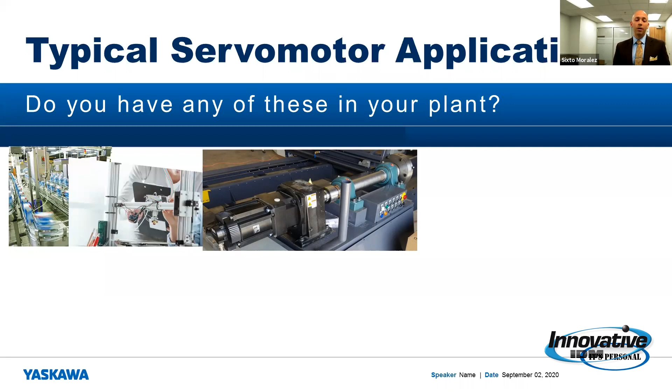At this point, we wanted to open this up to show a couple of typical servo motor applications. Maybe you guys have some of these in your plants, some bottling or labeling applications, maybe some R&D, looking at gantry systems or 3D printers. Maybe it's some sort of tensioning or winding application where you have to maintain tension on a particular process. Maybe it's a rack and pinion gantry system, 20, 30 feet long by 40 feet wide. Let's get a little more complex with a rotary knife application, a slitter, or a sheeter. Let's get really complex, and pull some pulleys in various places to reduce or make motion for rotating applications. And then maybe some large ones for linear actuators, to make some forward or inverse kinematics.

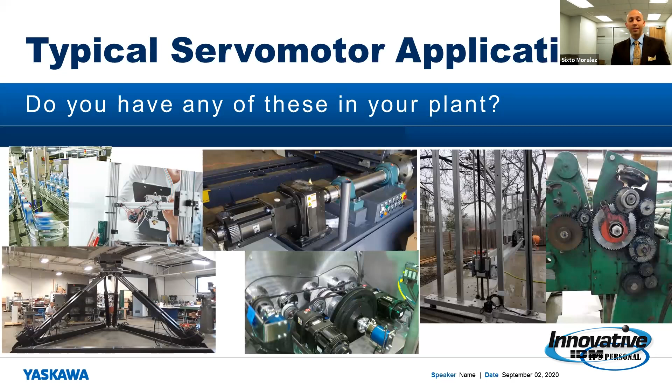So you guys all have your keyboards out, and in the chat window, if you wouldn't mind, let's take a couple seconds and type in what are some of the various applications that we didn't touch on. We'll take a little pause here and see if there are some applications you guys can put in there, so please feel free to do that.

Mr. David Cole says, yeah, we got some bag loading, palletizing. Very good, those are good applications. Okay, yep, got some other winding. Yep, okay good. Well, if you guys continue on typing in the chat window, we can review those at a later point in the presentation.

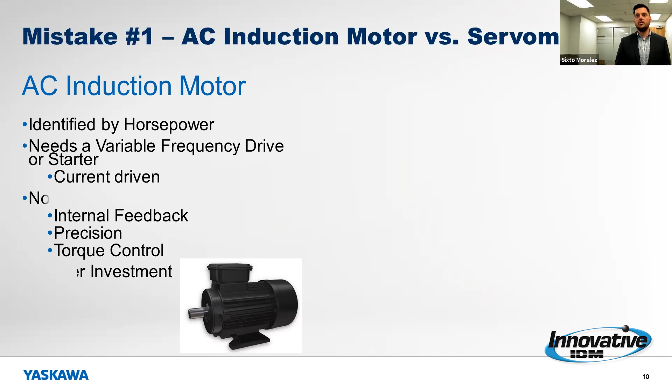Mistake number one is comparing a servo motor to an AC induction motor. The reason we talk about this is because most people, when they call us with an application for a servo motor, the very first thing they do is look at the kilowatt rating on a servo motor and associate that to horsepower on a standard AC motor.

It's important that you not do this, and there's a couple of reasons why. First of all, AC motors are rated by horsepower. They typically use a soft starter or a variable frequency drive to start that motor. They are current driven. Typically, asynchronous motors don't have positioning feedback or torque control, with a few exceptions, and they usually have a lower overall initial investment.

A servo motor, on the other hand, is identified by kilowatt, not by horsepower. So what people normally do is say, oh, I have a 1 horsepower motor, I need a 1 kilowatt servo motor. That's usually not enough information to go forward.

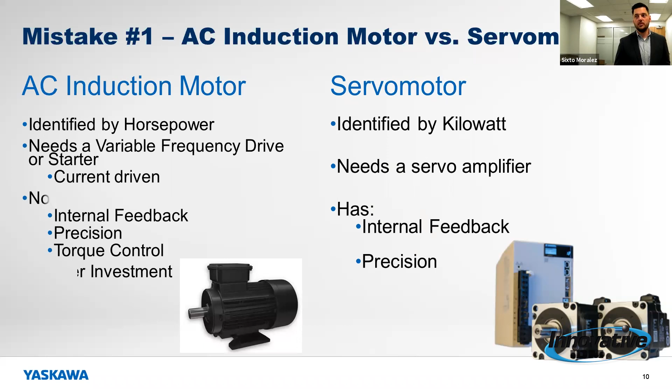The next thing people forget about with a servo motor is that they usually require a servo amplifier as well. Servo motors have internal feedback, they are very precise in their movements, and they typically have a larger upfront investment.

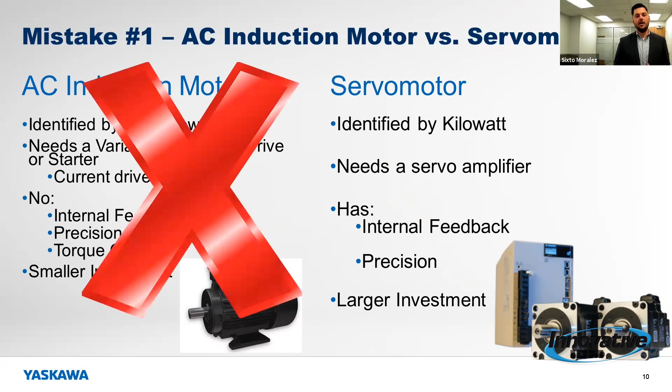So again, is it okay to use an induction motor as a guide for sizing a servo motor? No, it's not. Don't fall into this trap. That's mistake number one.

Mistake number two is ignoring the inertia ratio. This is something very specific to servo motors that you usually don't have to worry about with AC motors, so it's worth elaborating here for just a little bit.

So let's say someone calls you up and says, okay Sixto, I heard what you said about horsepower, I didn't size my servo based on horsepower, I did it the right way, I sized it based on speed and based on torque. That's all you need, right? No, it's not all we need.

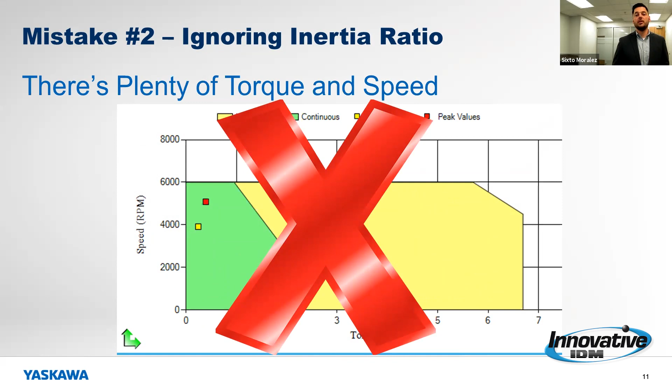There's a little more information that would be really helpful here, and it'll save you a whole lot of stress as you're implementing your motion system. So what are we talking about when we actually talk about the ratio of inertia in a system?

Well, what is inertia? Your high school physics class is probably coming back to haunt you a little bit right now. But basically, inertia is just the resistance of anything to move. It's also the resistance of anything to stop moving until it's acted upon by an outside force.

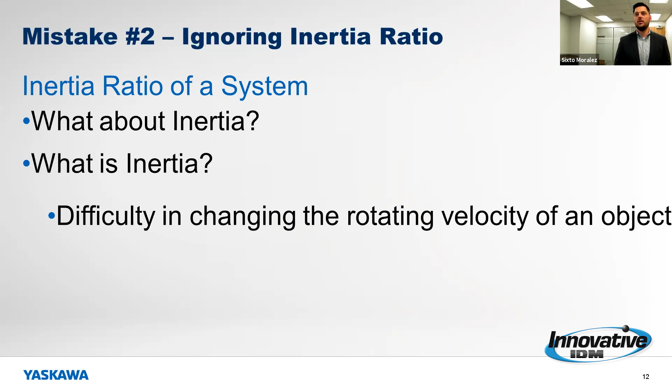Take, for example, throwing a tennis ball. If I were to just grab a tennis ball and toss it to someone, odds are they're going to be able to catch that tennis ball and control it really easily. Now, what happens if that tennis ball turns into a bowling ball and I have to lob it over to you, and you have to catch it and control it without dropping it? That's where inertia comes into play.

That's why it's really important that we don't factor in just speed or torque, but we also look at the overall inertia. It's also worth mentioning that not only do you have to concern yourself with the load inertia, you also have to concern yourself with the motor inertia as well.

Let's go back to our tennis ball example for a moment. If I throw a tennis ball, odds are it's going to take me just a little bit of effort to do so, but it's probably going to take even less effort for someone who's an NFL linebacker or a professional bodybuilder. In that case, just like a servo motor, it takes significantly more power just to get that motor going than it does to actually do the task at hand.

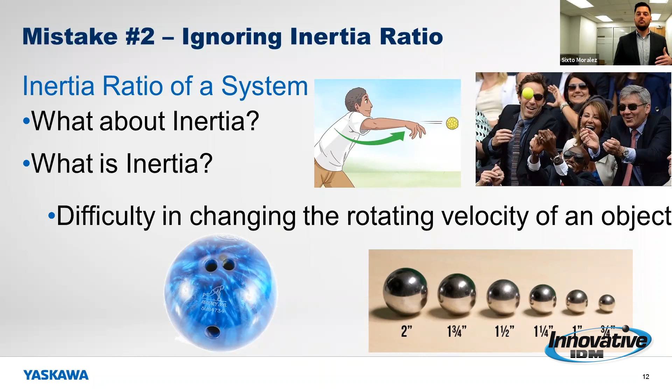So not only is it important to look at the load, but it's also important to look at the motor. Which brings me to my next point: when you're comparing these two, it's important to look at that ratio together as a complete system.

So in this case, an easy way to tell if we're sizing a correct motor based on inertia is to look at the inertia of the load divided by the inertia of the motor. Typically speaking, most manufacturers of servo motors can maintain a 10-to-1 ratio, meaning the load can have 10 times the inertia of the motor and the motor can still control it.

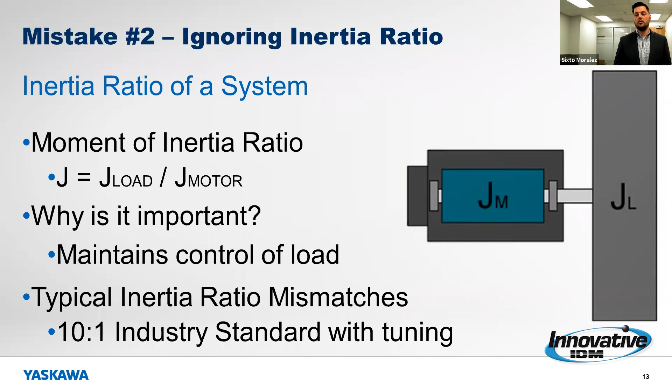With proper tuning, our systems at Yaskawa can go even further. So again, that's why it's important to take into account the ratio of inertia, because typically speaking, you can use a much smaller servo motor to get the same task done as a much larger AC motor.

Oh, this is a good one. Who's been guilty of this one? Feel free to answer in the chat window if you have a good story about this. But I can promise you, I get phone calls like this all the time. And I call this the competitor crossover trap.

It goes something like this. Someone calls me, they say they've got a machine and it's working, but the servo motor just crashed on it. And unfortunately, for whatever reason, they want to look at that servo motor and they want to just pull it out and replace it with a brand new one.

That's great. The problem is when people say, okay, I want to replace this old XYZ competitor servo motor with one from Yaskawa because of the known reliability. We know it's great, we know how it works. Awesome, I'm happy to do that for you. Is that going to be a drop-in replacement? No, typically that is not going to be a drop-in replacement.

Don't fall into this trap. Don't look at just the torque and the speed of your competitor and try to size a servo motor based off of that. Don't look at just the inertia either. Take it one step further.

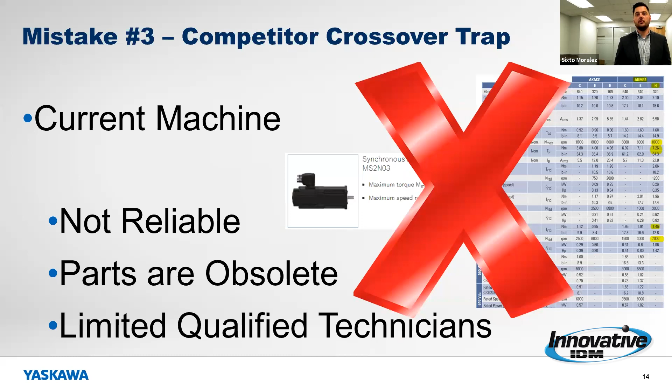When you look at a competitor's servo motor, bear in mind, not all servo motors are the same. There's different sizes to each servo motor, there's different form factors. There could be different shaft lengths, different shaft widths. Maybe it has a key, maybe it doesn't. There's a lot to factor in here.

Odds are the reason why you're calling in the first place is because that original OEM of that piece of equipment is gone. Maybe they're out of business, maybe they're not supporting you all that well. But the bottom line is, if you want to make sure you're doing this right, take that information from that crossover—is it just a guide? Maybe it's something you double check when you're all done. But don't rely on it completely to be 100% accurate and correct.

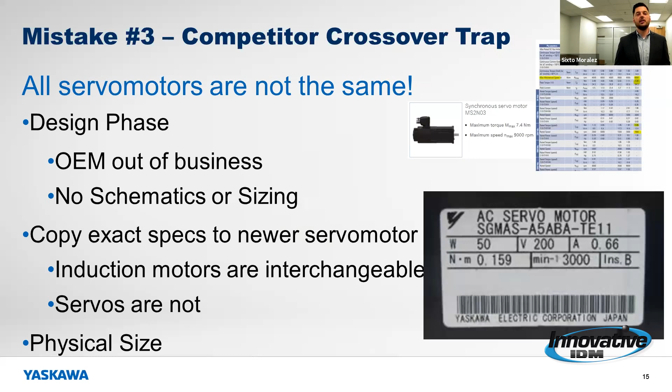And again, most of us, if we're doing this anyway, we're going to take that competitor's crossover information and probably upsize it just to make sure we're covered. So at that point, now you're looking at a servo motor that may be 20%, maybe 30%, maybe 50% larger than you really need it to be. So there's lots to keep in mind here, and you're much better off doing a full servo sizing from the ground up than just trying to copy someone else's previous information.

So with that in mind, Sixto, can you tell us a little more about some of the common servo applications you see in the field?

Why, certainly, Michael, I sure can. So let's review just a couple that we've done over the years. So the typical one is a ball screw, right? Got a gantry, some sort of a gantry style. Take a look at this picture here.

This is moving in a horizontal direction, going back and forth of some sort. There's some sort of station whereby the x-axis is moving left and right, some sort of jobs that have to happen. So those types of applications are going to need some sort of precision for that movement.

So the questions we start asking ourselves are, well, what is the load? What are we moving? What is the payload? How heavy is that? How heavy is that enclosure? How heavy are those brackets?

Again, an overall estimation may be good, but if you have a current working system, maybe there are software tools built into the control that's already on that, so you can pull off and say, well, it's really only ever using 5, maybe 10 newton meters of torque, maybe 2. Because remember, if the motor is rated for 4,000 RPM, but your movements never hit anywhere near that number, then there's really no need to use a 4,000 RPM motor.

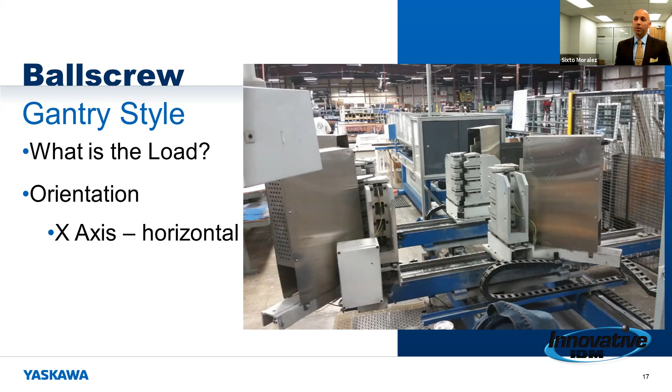So that's one question. The next question, obviously, as you see here, you know it's going to be horizontal, but it could also be vertical. So the orientation is important because gravity can affect the motion profile, can affect the payload, which in turn will affect the servo motor as well.

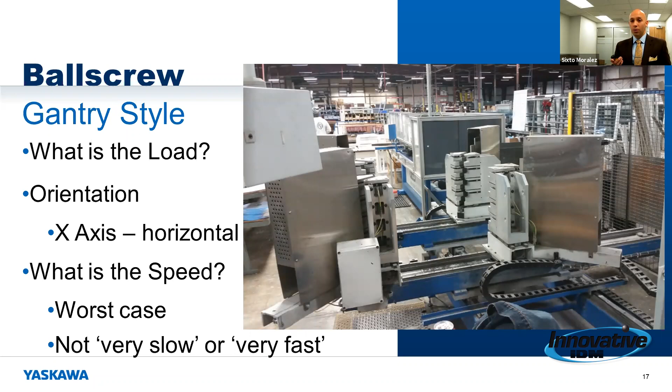This question: what is the speed? It's kind of hypothetical—what's the speed? We typically want the worst case, but it can't be very slow or very fast because it's relative, right? Relative to someone who's moving very slow, 1,000 RPM may seem slow, whereas somebody else may think no, that's actually very fast for the machine. So those are some typical questions that you would start asking about the applications that you see.

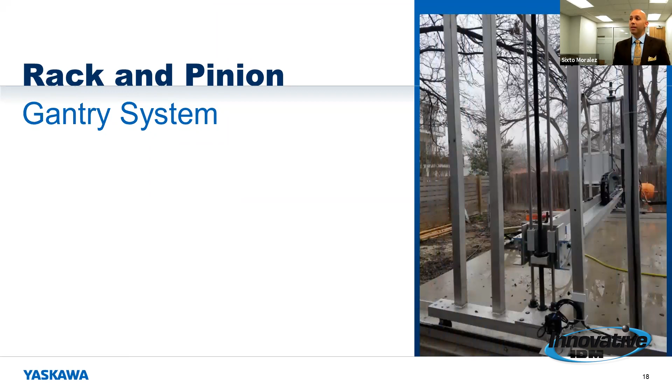Change up a little bit here to a rack and pinion system. Still with a gantry style of a system, but let's take it outdoors. Maybe you see how far the axis has to travel. This is a pretty big gantry system here. Maybe it's a 40-foot length of travel, maybe 30 feet high and 20 feet wide.

It can't be just it's got to go just this much or just a little ways. You typically want to have what the distance is that you want to make a move profile in and to do the travel.

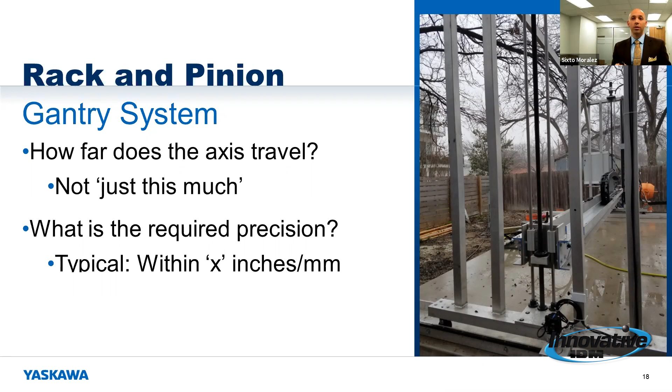So precision, what's the required precision, or what's the typical tolerance that you need to stay within? Some applications are perfectly fine staying within a quarter of an inch or half an inch, and some of them have to get into the 2 millimeter or 1 millimeter window. So it varies from application to application what the precision required is.

And if you don't know, if you already have a current machine, typically you can guesstimate where you need to be on the precision question.

As this application is showing, the environment is going to be outside. So this is in Texas. It's going to see 120, 130 degree weather. It may even see a blizzard if you've been around last month. So it has to sustain those types of hazards or environments.

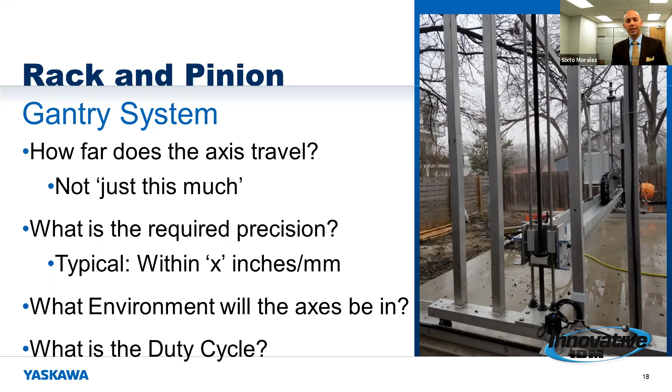As well as the duty cycle - how often is this thing going to be working? Is it 100%? Is it 30%? And those sort of things. You may not know the exact number or percentage of the duty cycle, but you know in my shift we have 2 working shifts, so 5 or 6 to 9, or 6 to 12, whatever that is, you'll know kind of what that duty cycle is that you need for the machine to be running.

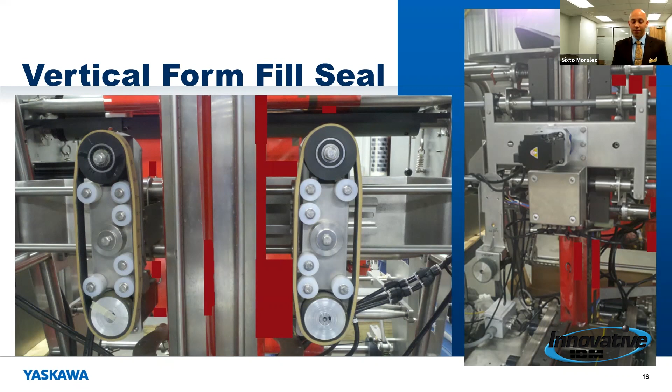Your true typical vertical form, fill, and seal machine. So it's bagging anything from small, say peanuts, to dog food, cat food, that sort of thing.

Let's not forget, on the same vertical form, fill, and seal machine, that a servo is doing what's called a pull or a film pull, where it's feeding in the film. There's some tension that's going on up top, but you want to maintain that. And so right here you have the 2 pulleys. There's a ratio between these 2 here that it's actually pulling. And so we want to be able to size that appropriately. You don't want to go too big, but then again you want to make sure it has enough torque to maintain for the speed.

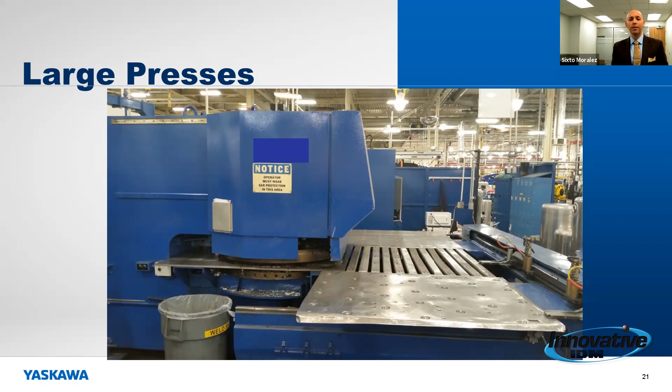Let's get really big, let's do some large presses. On the left-hand side you notice that there's a rotary of some sort. So there's some sort of a rotary application or rotary motor that might be useful to rivet or to drill some holes, as well as the indexer that goes in and out. So that could possibly be a servo motor application as well. Just things to think about as you're going through the plant and wondering.

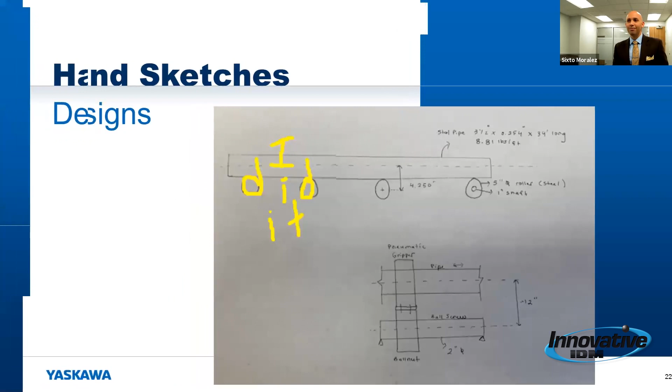So it's always good to be able to go through these types of sketches. You may say, well, my payload is going to be up here. I do have the 2 drum rollers that are bound over here. We could maybe add a little idler roller at the bottom. And then there's some sort of palletizing machine that's going to be on the left-hand side. Who knows? But that's what R&D is. So we can go from there and at least take some specs to know what we want to do to size it.

All right, as promised, it's Michael's turn now. So we're going to talk about some gearbox selection and some important tips.

Excellent drawing as always, Sixto. It's always a good idea to make a hand sketch, especially when you're trying to understand the key concepts. And speaking of key concepts, let's talk about gearboxes for just a second.

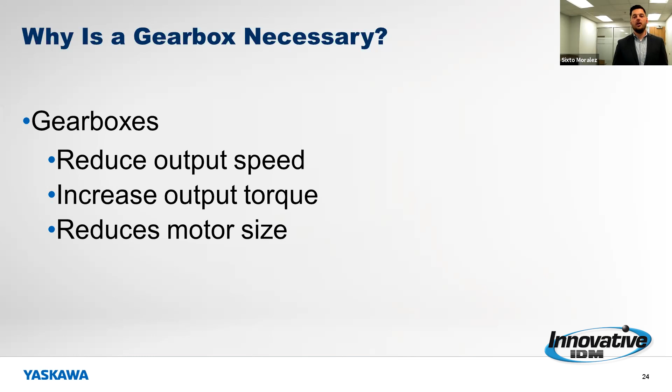So why do we need a gearbox? Why is a gearbox necessary? Well, there's 3 things that typically are accomplished by using a gearbox. 1, you're going to reduce the overall output speed. 2, you're going to increase the overall output torque. And 3, odds are you're going to decrease the motor size. All of these are very good things for the right application.

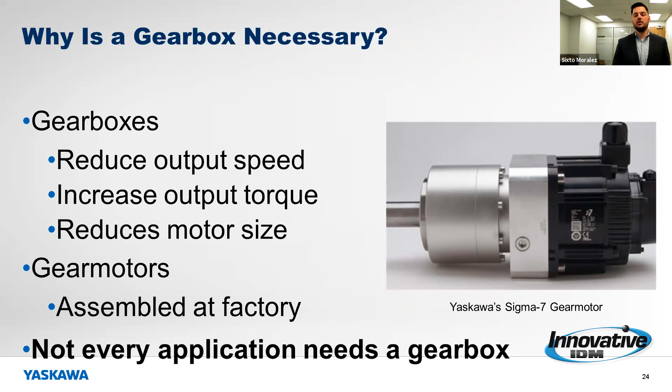Okay, another thing that's really great about using a gearbox is the fact that it reduces reflective inertia of the load to the motor by a factor of the square of the ratio. So if you're using a 10-to-1 gearbox, guess what? That's a 100 times reduction in that reflective inertia. So it's going to help out a whole lot if that's a problem for you too when you're sizing.

Now, I'm going to tell you a rule of thumb as well. As a sales engineer who's been doing this a long time, it's always best to try to start with a 10-to-1 ratio for your gearbox if you're going to have to use one. And here's why. As most of you are already aware, gearboxes are set up in multiple stages. You have single stage, 2-stage, 3-stage gearbox, etc. 10-to-1 is the highest ratio you can get in a single stage gearbox for most manufacturers.

So if you're going to have to use a gearbox anyway, using one like this is going to give you the most bang for the buck and give you the most value. So use that 10-to-1. It'll also help you reduce your motor size, and odds are you'll be able to balance that motor size and that cost of the gearbox really nicely with a 10-to-1 reduction. So again, shoot for a 10-to-1 reduction. If you can't get it done there, look at what you can do to change that. Maybe you need to go to a higher ratio. Maybe you need to go with a bigger motor, etc.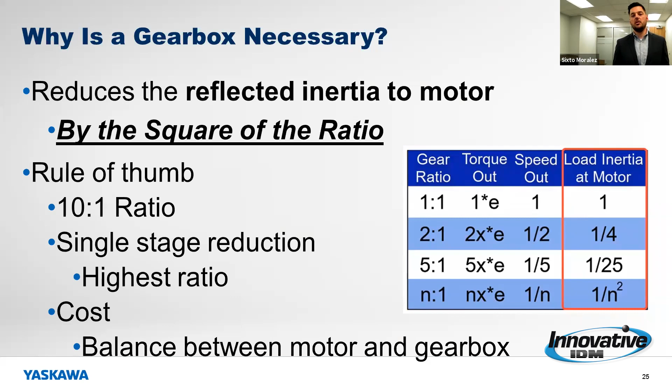So now, Sixto, tell us a little more about where we can find more information on Yaskawa Motion.

I'm so glad you asked, Michael.

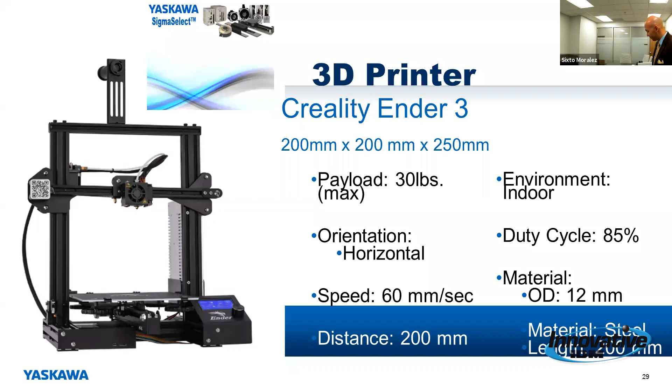All right, let's see, Pepper, this should work. So again, the sizing software is free for download. What you find at the very beginning is just putting in some credential items. Maybe you have some information you want to send, or put in your name, company name, email address. And then there's some application notes, you may want to type in, this is a 3D printer prelim. Be sure and save, because you always want to back up your stuff. But in this case, I'm going to continue on.

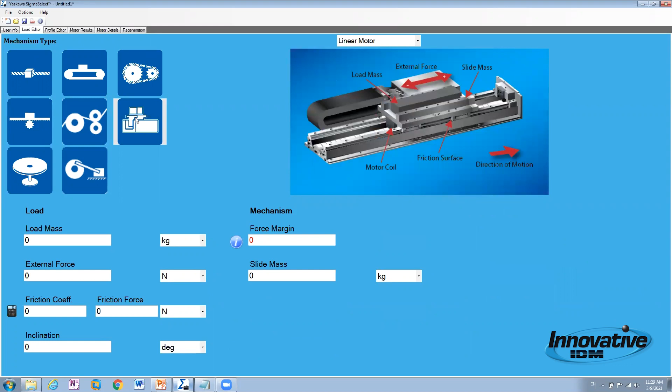We mentioned earlier that there are different mechanisms for various applications. So just to go through these, we've got a ball screw, we have a belt system, there's a chain and sprocket, the rack and pinion that we showed earlier, a roll feeder. These are also typical in a lot of different applications. We have a linear motor we can put in as well, if we want to go basic we can do some rotary tables or rotary applications. And there's even a cool one here for a crank application, whereby you can size up a crank mechanism.

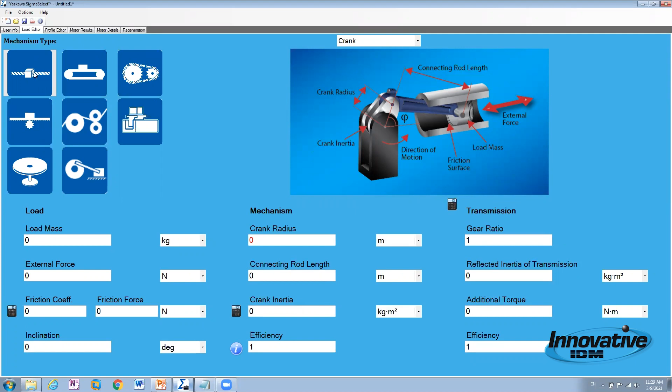In this case, we're going to stick with the ball screw. It may be a general one, but it's pretty simple. Load mass, right here is where we put in what that load mass is going to be, and I think we decided on 30 pounds.

Maybe the part is no more than 20 pounds, and maybe the plate adds another 5 or 10, so we'll just say 30. There's no external force, but we're just going to touch on the main parameters you want to enter into the sizing software here.

So the coefficient of friction, the materials, we'll do a mechanism with ball bearings in there, so we'll just keep that coefficient of friction low and say accept.

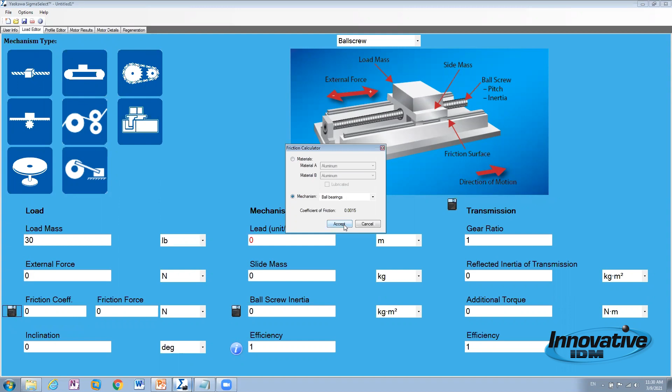Now, this is not vertical, so we're going to keep this inclination at 0, that's horizontal. This lead, we want to know how many units of travel we're going to move in one revolution of that ball screw. Let's keep it in inches. We can change the inches here. We'll say 1/4 of an inch - one rev of that ball screw is going to be 1/4 of an inch.

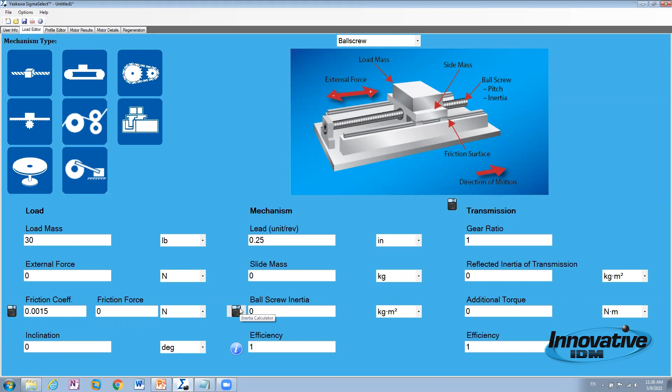And now we actually have to find the inertia of what we're rotating, as Michael had mentioned in his slide. You can change this name here to a ball screw if you wanted to, or whatever name you want to give it. These units can change as well, but we'll keep it in millimeters for now.

And let's just say the height of this is 180 millimeters, you could put 200 as well - we'll just put 200 for the entire length of that ball screw. The outer diameter we mentioned was 12 millimeters, so we'll just say 12 millimeters there.

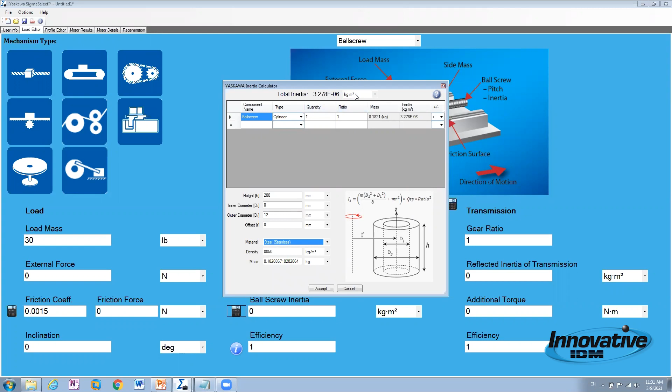And then the material - we have quite a few different material selections here. We want to pick the stainless steel and keep that, and that gives us the inertia of the ball screw. We'll say accept.

Now, at this point, your mechanism is pretty much done as far as what you enter into the sizing software. We want to leave the gear ratio at 1:1 just for now to see how big of a motor we even need to run this thing by itself. Let's move on to the profile editor.

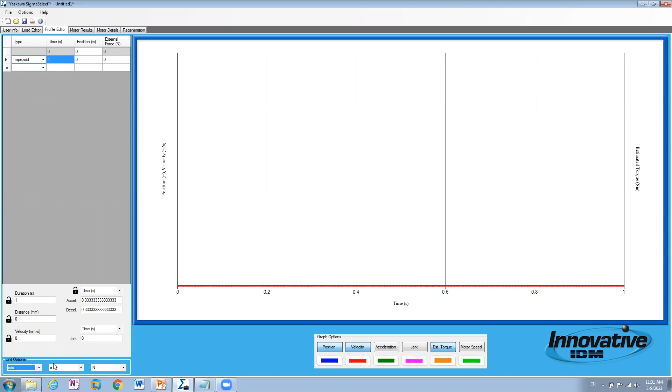This is cool - the drop down here, if you just select a trapezoid, it'll give you a third order motion profile. We can change these user units to millimeters per second. We did say that the Creality Ender was at 60 millimeters a second, but for total distance, let's do 200 millimeters.

And in the acceleration time, we want to get that up in the half-second range - you want to get the speed pretty quick. So you can see that the motion profile is starting to build upon itself here. You can take a look at different options or deselect some of these options.

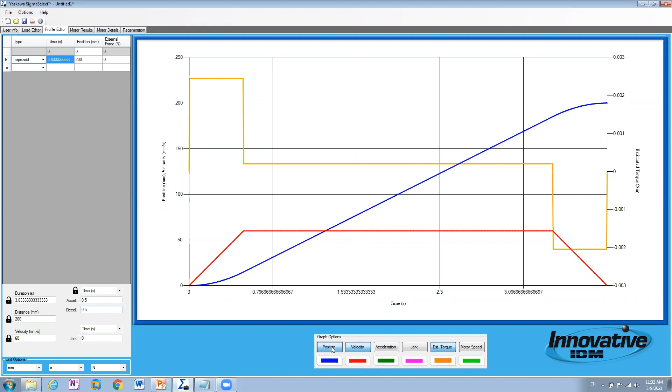So the position - if you don't really care about the position just yet, you can look at your velocity that's going on here. You can look at the motor speed to actually know if your motor is going at the speed that you believe it should be. Let's bring back motor position there.

And then it's always important to do a return move - in this case we'll just keep it at 1 second, and the return move is just negative of everything that we've done there. That real quick, 200 - there we go. So again, I'm just copying these same numbers in here. All right, so let's say that's a return move, and the dwell, we'll just leave it at 1 second.

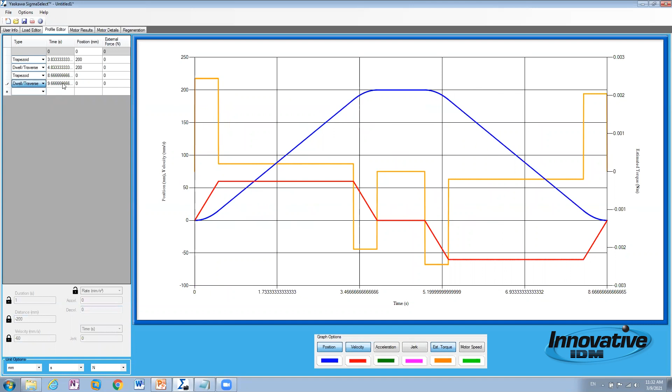So now we want to look at what are our motor results. Now it does give you a bunch of information here. We're just going to uncheck all this stuff and just look at the Sigma 7 - Yaskawa's Sigma 7 series is the latest and greatest. And we want to uncheck this torque factor of safety because we want to look at what amount of torque do we really need to move this motor.

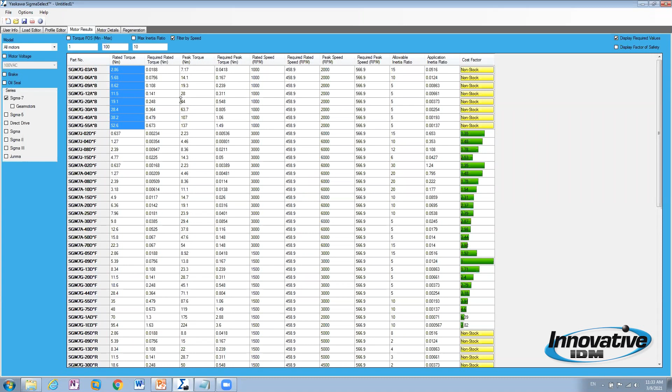And we can display what the required values are for the application - so the required is right here, what the motor has is here. But then let's also do the factor of safety. I like color, and usually green for everything is good.

So if we look at this 7J 200 watt motor, we can see that there is enough factor of safety for the required rated torque, the peak torque, the same thing for the required rated speed and the peak speed. But the thing we want to pay attention to is this inertia ratio - this is a pretty low one here, very very low, which means the motor has more inertia than the load, which is fine - we can still work with that.

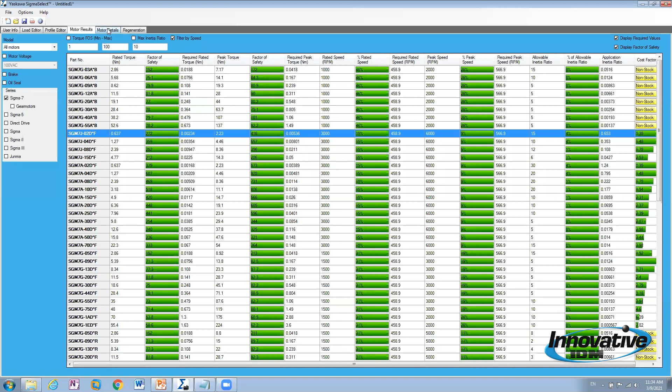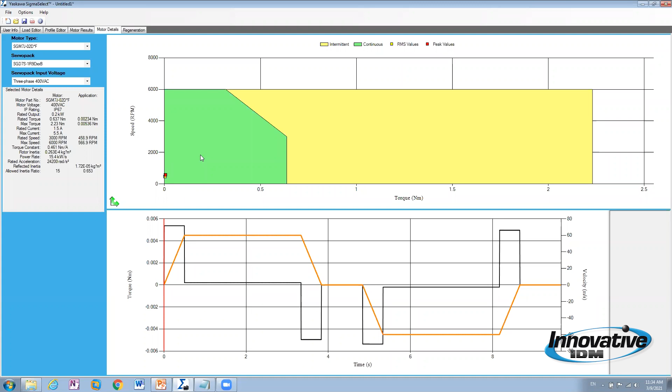And then in the speed torque curve, we give the ability to look at what's in the continuous region and what's in the peak region. This is a good one to just verify that you're not outperforming the motor by any means. The last tab is this regeneration tab.

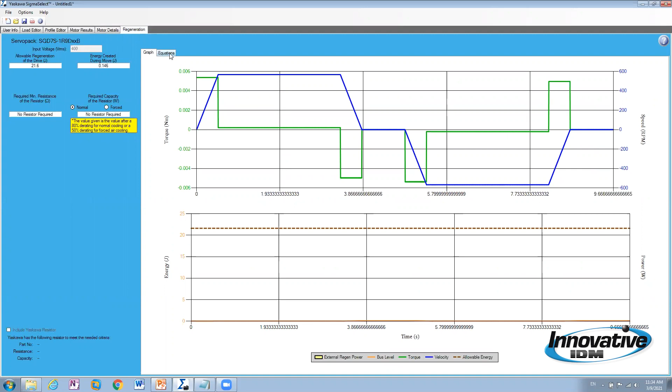Now this will give you if there's any sort of regen that's needed. And typically on horizontal applications, you don't get that. The equations would be here in this tab as well so that we can verify that sort of thing.

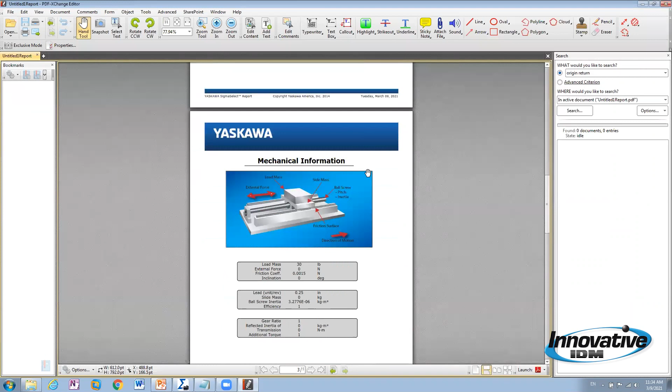Once you save your application, you then can get what's called a PDF report. It'll give you a little report that spits out how all your application is running. You can kind of give this to either your customer, OEM, different specs and so forth as to what the sizing file will entail and how it moves, as well as the rated data of the motor and the application.

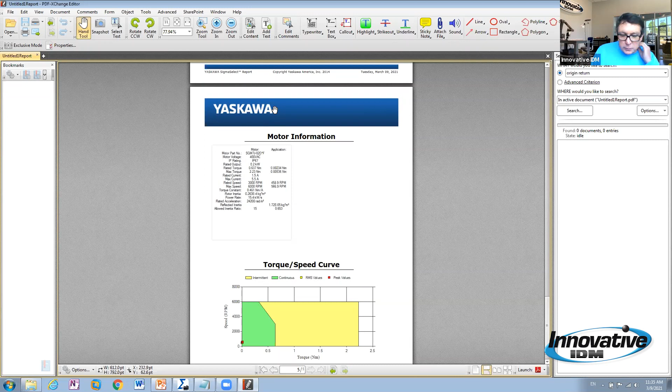I had one more for you, Michael and Sixto. Says, I have a rotary table with 5 stations. Good for servo, yes or no?

Yeah, that's an excellent application for a servo. As you could see earlier, that's one of our templates we already have pre-built in our sizing software. So that's very helpful as far as that goes.

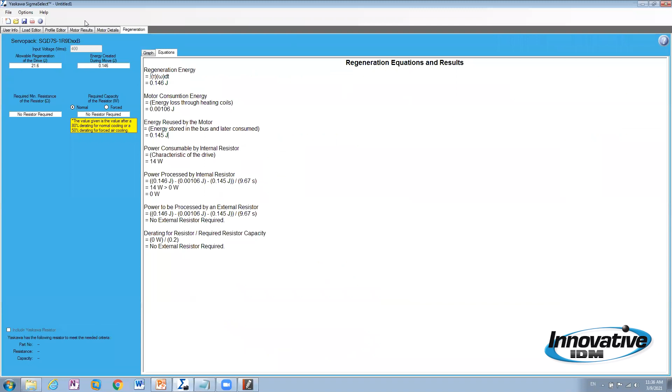The nice thing too about using a servo for a rotary table is that we can handle the inertia of turning back and forth, or we can go all in one direction depending on what the needs are. So yeah, that is a very good application for a servo motor. Thank you for asking.

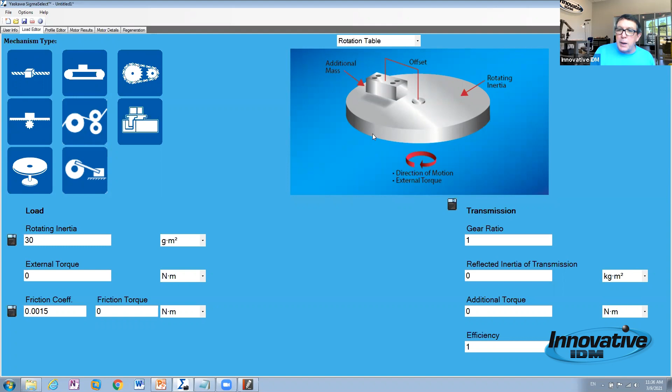Great. So if we went to the beginning of this, somebody came in and asked about a valve actuator. I believe it was Weston that asked about it. Is that a great application as well?

Yeah, that's actually very similar to a rotary table when you think about the mechanics of it. You're still turning one way or the other, and let's say even if that valve has a little bit of an offset for where that main mass is, we can account for that as well. Depending on the industry too, we have folks that can help you provide ruggedized versions as well for our products. So yeah, those are all things that are well within our wheelhouse.

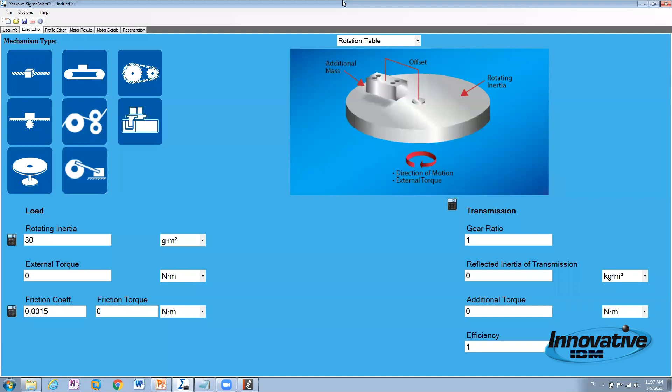Down here in Texas, I feel like we have a lot of valve actuation questions, and the unique thing that servos provide to that is we can really size those servos in really well for valves to where you are maximizing the use of that torque when you first need it to open that valve, and then reduce it down real low once the valve is already moving. So there's a lot a servo can offer in an application like that.

David had asked about a palletizer. Can you comment on that?

Yeah, so palletizers are one that could be, you know, in a gantry style, let's say a T-bot style, where you really only have an X direction and a Z direction, where you're going down to pick up a bag or some sort of product and move it over to the left or the right side or wherever it's going to be to drop it off.

In most applications, you don't need a full six degree of freedom robot. You could do the same sort of thing with some sort of end effector and a T-bot style gantry, where you would have a ball screw that's going back and forth, or rack and pinion going back and forth for the X, and then going in the down direction would be maybe a ball screw as well on both sides.

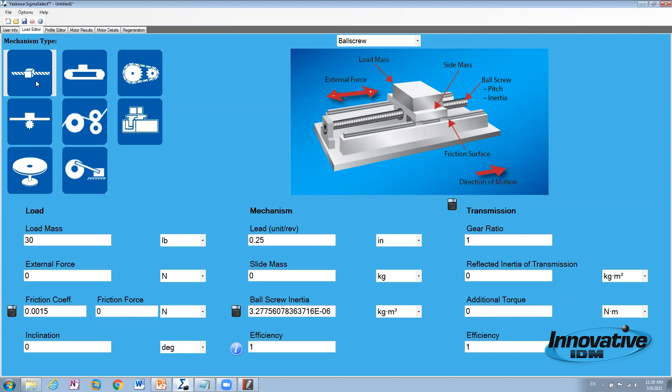But in any case, we have templates that can work with palletizers where we can go in and size those types. So there's an excellent application for a servo motor.